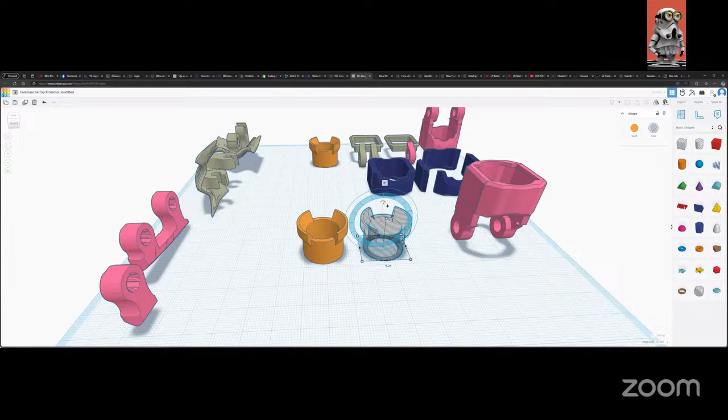So I already made a copy and stuck it up there at the end. I can actually invert it, so it's going to be a delete. And what I'm going to do is turn this thing upside down and then take it over here, and I'm just going to take it down and zoom in.

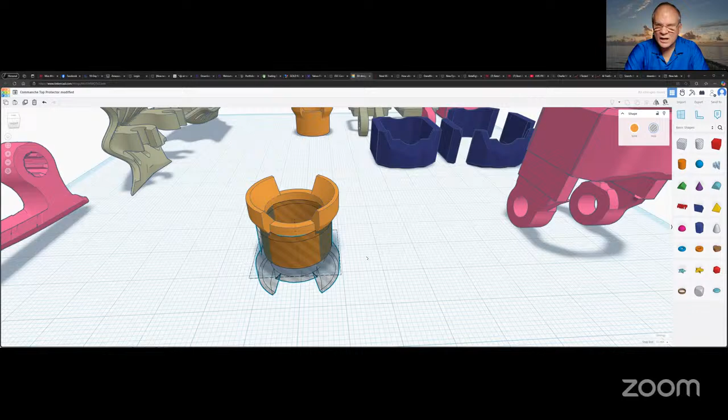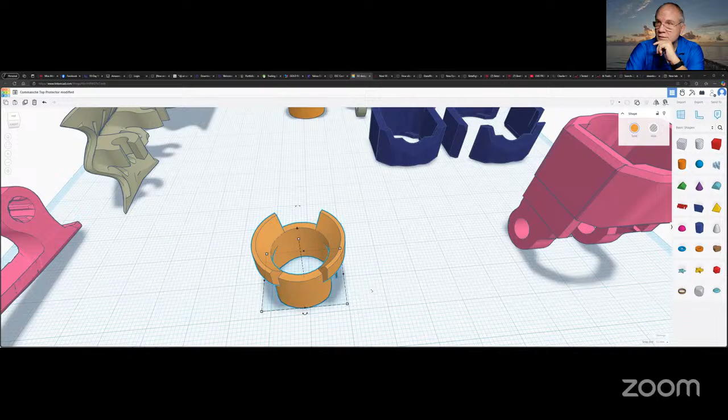So I'm kind of cutting the top of that thing off, right? Yep. So you just highlight the two, go combine it, and it does what you want it to do, hopefully. Oh, come on, do the deletion, Tinkercad. You might have had overlapping geometry.

Have you tried just a square? No, it's supposed to overlap because I've tried to delete the thing. Oh, okay, I see, misaligned geometry. I see the problem. Yeah, misaligned. Yeah, that's what I was gonna say.

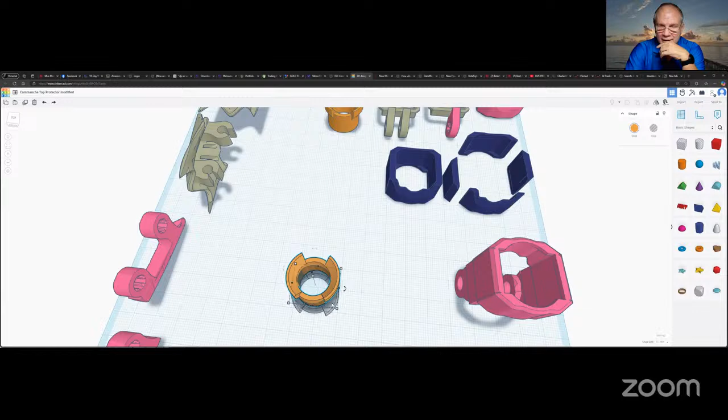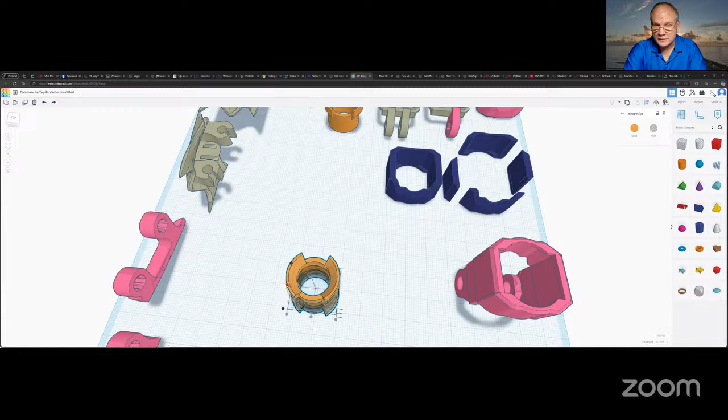When I do a Boolean operation like that, if I was just chopping off the bottom, I would do an oversized cube, line it up orthographic from the side, so I knew exactly where it was at. So Tinkercad allows you to highlight both things, click this little alignment button up here, and you'll see little dots so you can align it on the dots.

So that looks a little better. Yep, now it's probably actually aligned. Now you can see overlapping geometry. So now let's do this, we'll highlight it and put those two pieces together.

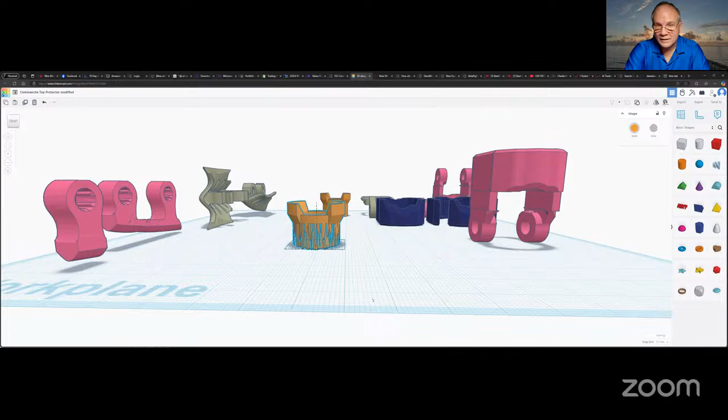Really? Oh, no, come on. They're the exact same thing, one's upside down. Yep, but they're really, really close. So you probably chopped it all boogered up. Yep, you did. Try a larger cube as your subtraction object.

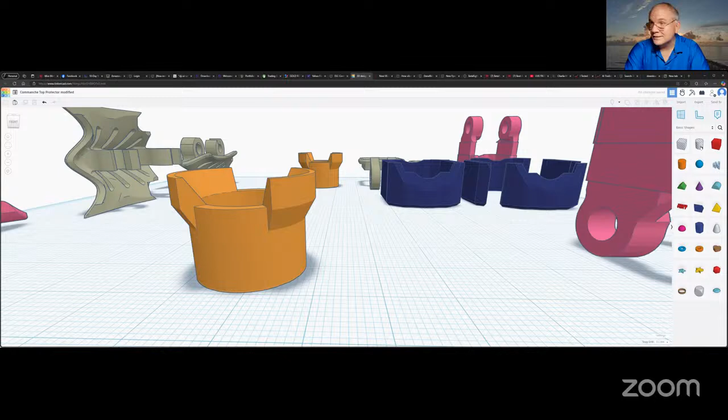Yeah, you know, I got a better idea. Or scale it. This is the kind of shit you fight in these damn apps, right? So I'm just gonna take a circle. Yeah, okay, a cube or a cylinder. Yeah, but make that your cylinder, make it a subtraction object, larger. Yeah, there we go.

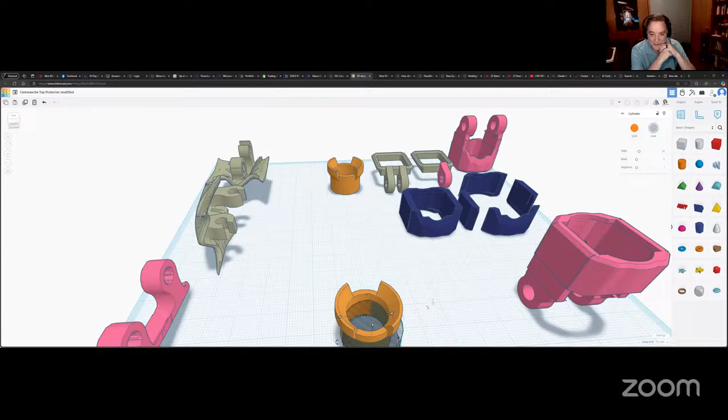That's how I would have always done it, because if you had overlapping geometry when you tried to do a deletion or a Boolean, you always got errors. So what I tend to do is exaggerate a bit, now I know I'm taking it out, right? And go, okay, now give me what I want. Okay, that's better.

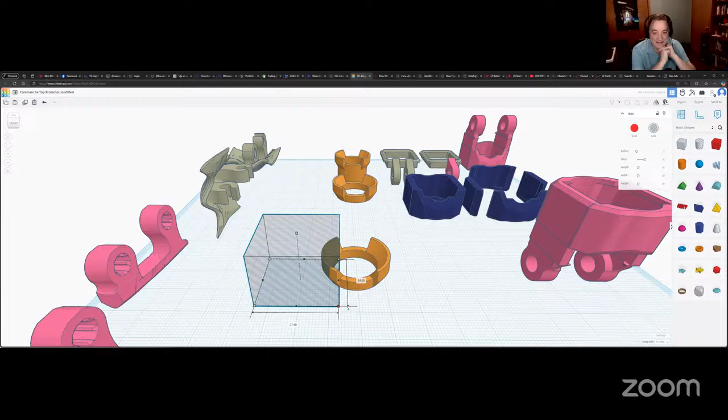So mine is kind of square, right, and that's the way this thing sits. I can't do the bottom or the top of this because that's where the mount points for the ND filters fit. So what I really want is these two things. Control C, Control V, I'm going to make another copy, stick that over there, and do something kind of similar at the center, taking half out at a time.

Why not scale your box down and take the center out and do both sides at once? Because then both sides will be one object. Yeah, but you need each side to be its own independent object. But if you're mounting stuff to that, don't you want them to stay the same size? No, because I'm gonna spread them apart, resize them to fit up on this thing. Those two round pieces, they connect to something, correct? If I took out the middle, as far as Tinkercad goes, they're one object.

Right, that way you could scale them both at the same time. You wouldn't get scaling issues trying to match them both individually.

Yeah, it kind of depends on how well this is gonna fit. I may need one that's a bit more square instead. I don't know what you have in mind, so I'm trying to jump ahead in the way I would do it, but I might not have exactly what you have in mind.

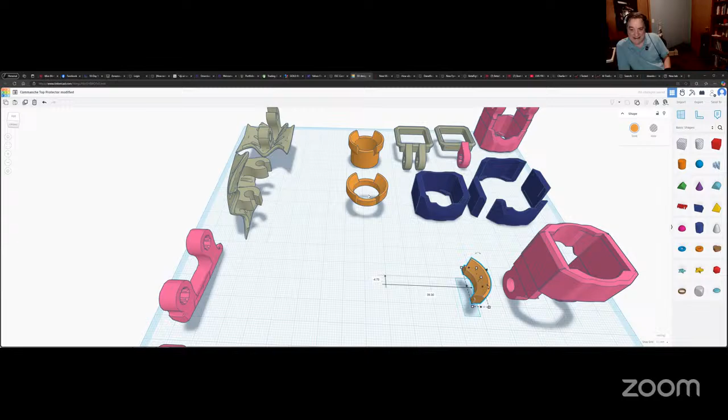Yeah, so there's one, well that's why I thought I'd... oh come on, paste, damn it. Okay, so come back. Oh come on Tinkercad, get down here, damn it.

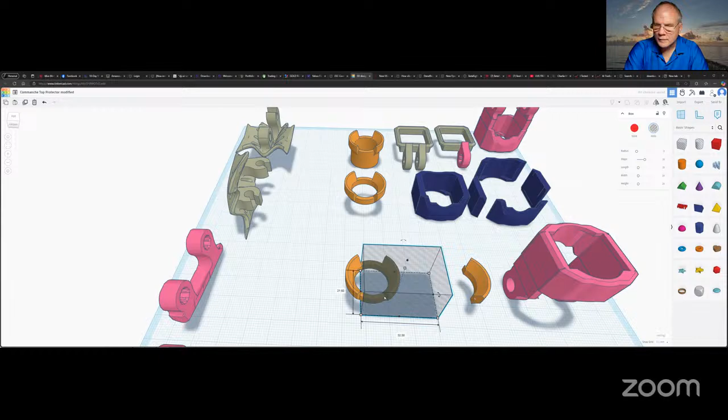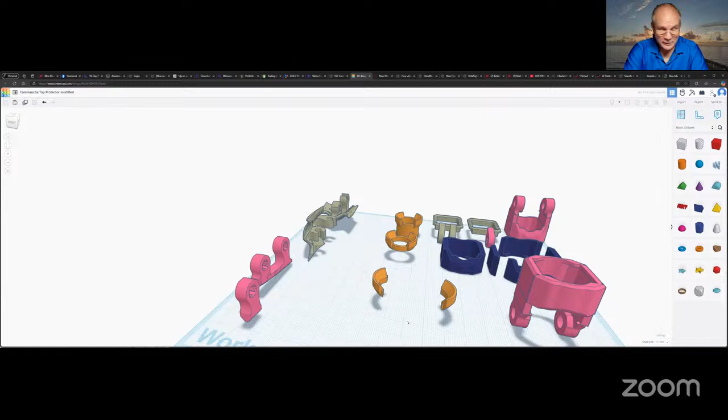Zoom in. Nope, right on, no that's about as close. There's a little triangle in there, but whatever. Usually I mush those things together and you end up never seeing them. Okay, now I got the two little independent pieces.

And you're right, theoretically they should be the same scale and all that. But if I click on it, I have dimensions, so I can literally make them the same dimensions. Actually, I could have just taken this thing, copied it, and rotated it 180, and I'd have had the same thing.

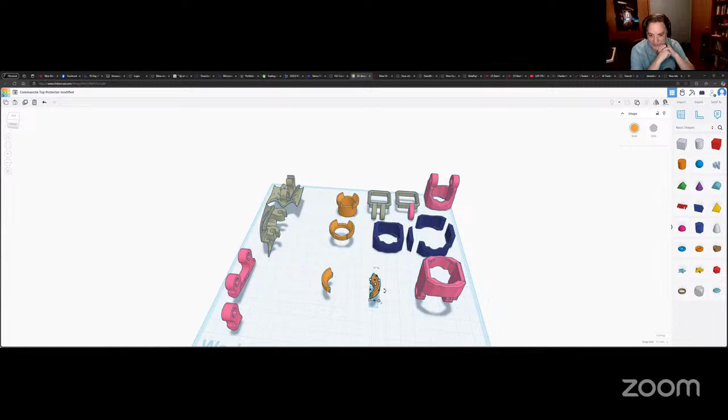Like I said, Tinkercad is basic objects, and you just got to learn how to manipulate things. Boolean operations are fundamentals of 3D creation. Nah, it's a lot of work. That looks a lot simpler than Lightwave.

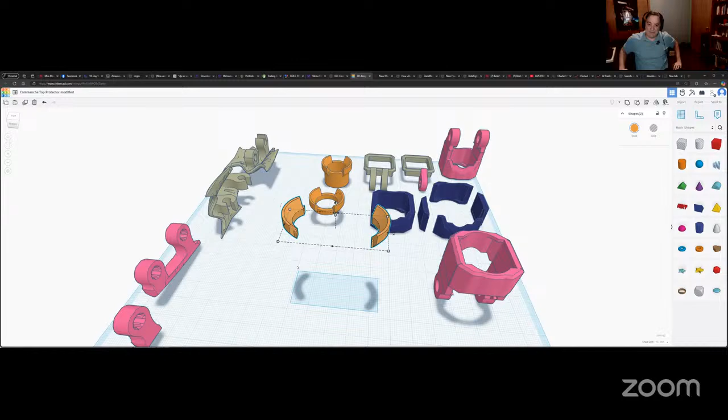Can you open up multiple view panels there, or is it just one panel? Just one panel. Oh, that sucks. Because Lightwave, you can have your 3D panel, and then you have your 3 orthographic views - top, side, and back. Keep in mind, this is from Autodesk, so they're not going to make it easy.

AutoCAD was bloody hard work. This is a dumbed down thing that they have for creating. It's free, so everybody uses it because it's bloody hell free.

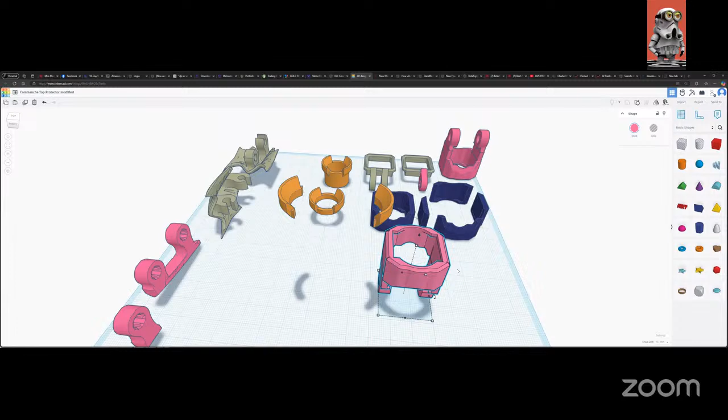I should have changed my scale back to 1 millimeter. Anyways, I'm just trying to get it in the center of the screen. Oh, not that - hold the control key. There's probably an easier way to do this, but this is just kind of how I know how to do it in this freaking app.

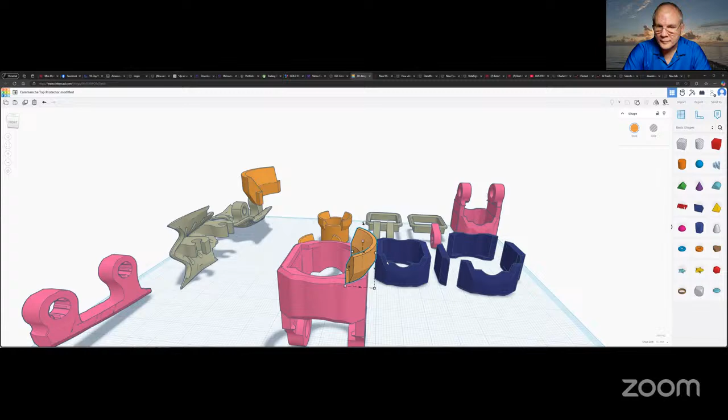Okay, let me get here. Oh, I'm a long ways off. Yeah, I'm still a ways off. Okay, I'm not off anymore. Now let's move it.

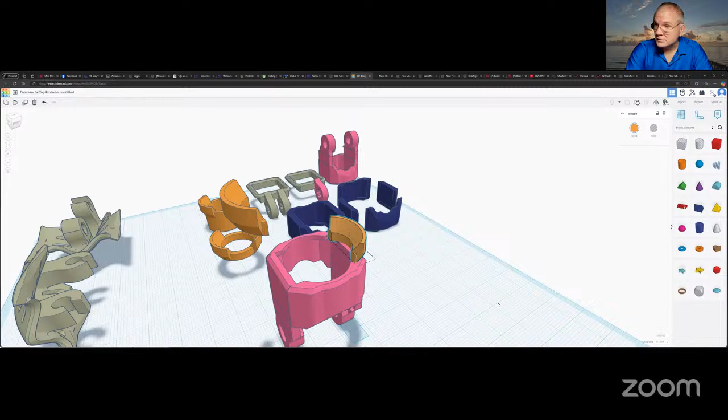Wow, guys, that's pretty close. The points are touching, so it would print okay. And there's a way to kind of fix this because it's not quite long enough, so let me do this.

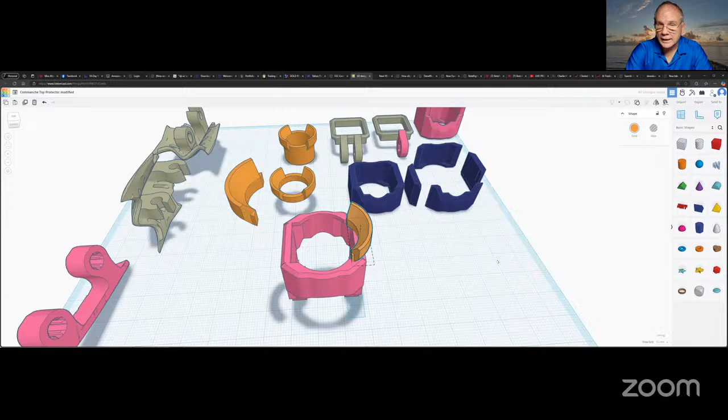Let's go instead of 18.2, let's go say 19, and then stretch that thing down. Actually, maybe I should do what I said - just copy it, rotate it 180 and put it on the other side. That would actually be easier. It looks like it needs to be longer, doesn't it? Okay, let's try 23.

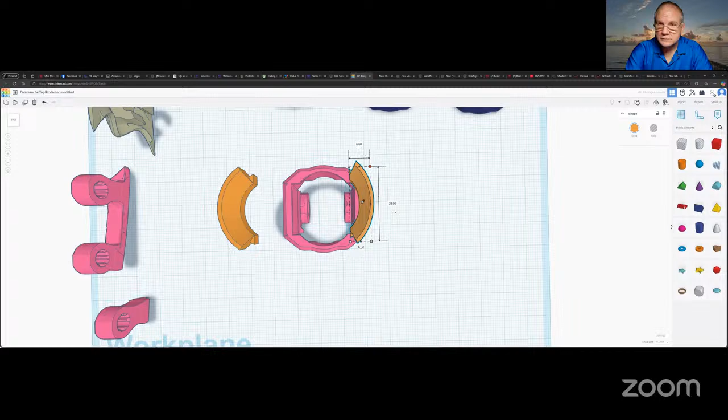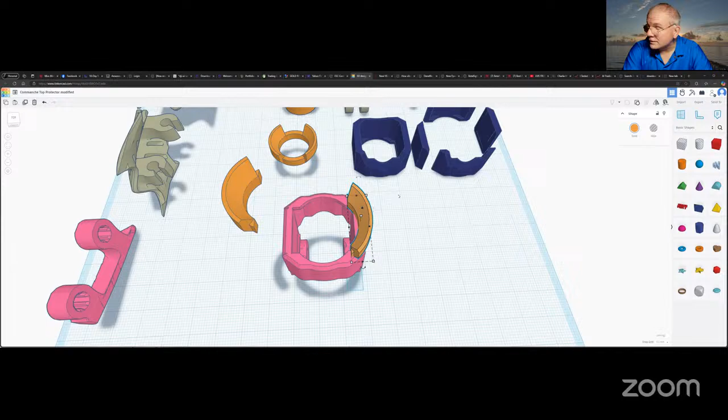What are those curved pieces that you're working on there? Are they a hood? Yeah, it's kind of like a hood. Like a sun hood? Or no? Lens hood. Lens hood, really. Yeah, and that's so that if the thing goes in nose first, the hood takes the hit, not the camera lens.

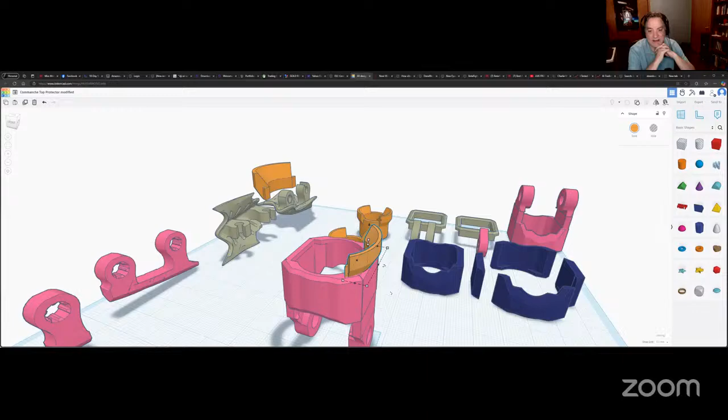So I need it to be spread out so that the camera won't see it in the wide view. It could conceivably be not just that - it could conceivably be just four or five pieces sticking out like that, depending on how much weight you want to put on it. Well, that's kind of the other part - you don't want it to be too damn heavy, right?

So if you were to have done like so, ideally I would do a different kind of curve. I just don't know how to do fucking curves in this application.

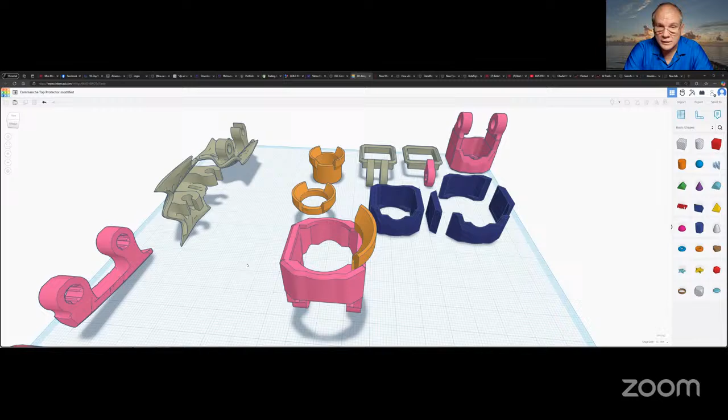Here's the funny part - I created that, now I'm going to delete it because I think I'm going to do what I was telling you, which is just copy it, rotate it 180 and put it on the other side. Literally when I do that, I can use the arrow keys and it should be lined up with the one on the other side.

Yeah, come here, move. Yep, those two pieces are touching.

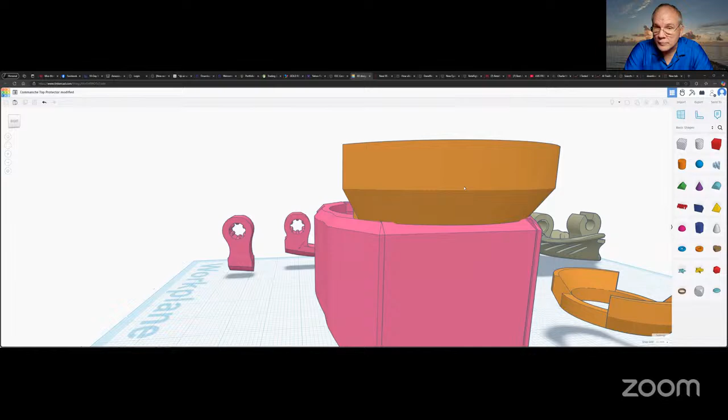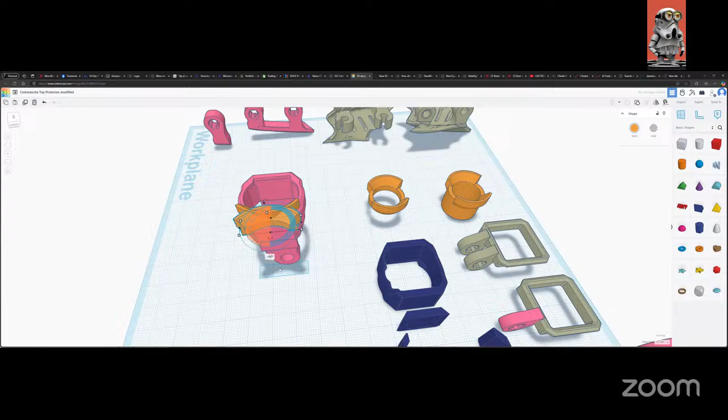The fun part of curves will be pretty straightforward. You just use a circle, put it in, and either delete outside it or inside it, one or the other, depending on which way around you want the curve.

You're not wrong. They've got another tool that's sort of a bendy object that you can use. They don't have a mirror tool.

Oh, you have a mirror tool up there. Okay, so when you do a mirror, it doesn't mirror across. Oh yeah, right there. Does it not mirror in world space, or is it just local space? Local, I would assume, local to the object. Whatever you have highlighted.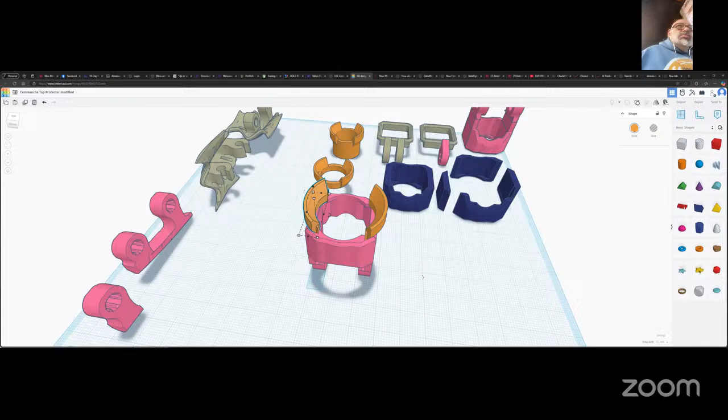Okay, let's try it. Oh, there you go, see the arrows? So you can mirror whichever direction you want to mirror it. Yeah, but it does look like it's only local to that individual object and not world space. If you shift click multiple objects, then it should treat it as one big object and mirror the whole thing.

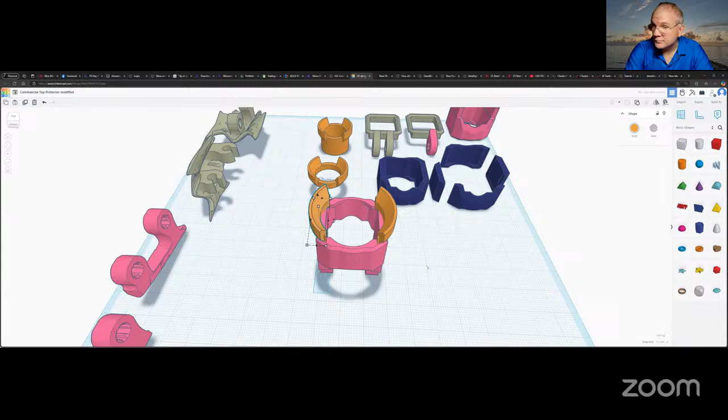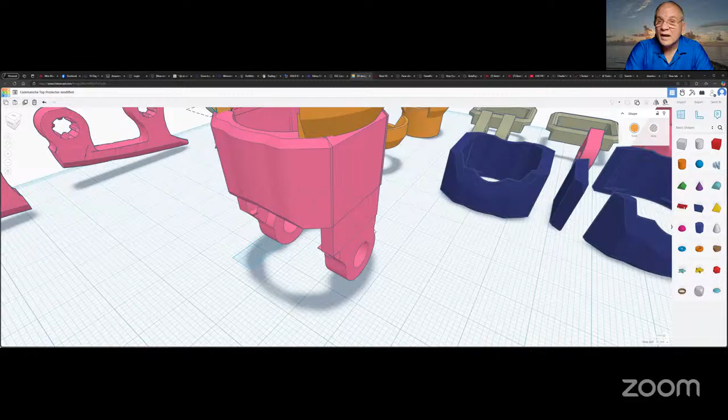Okay, now let me see something. So on this side, how close is that outside edge of that circle? Looks like it's right on the outside edge. And let's see here, that one's hanging over the edge, and that one's on the outside edge. Okay, that's weird.

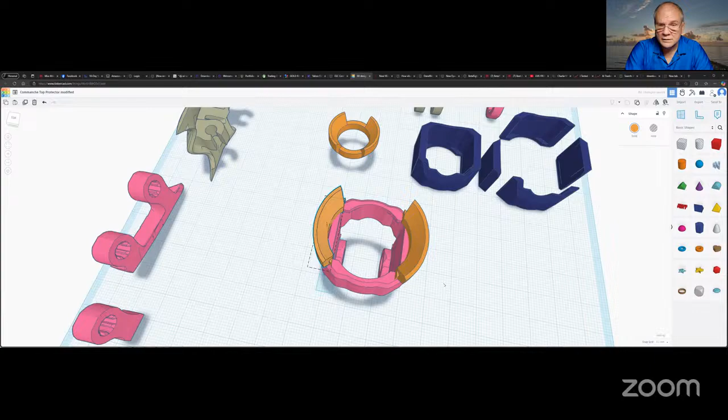The reality of it is, I think -- oh, he cut one side thinner than the other. When he designed it, he cut it one side thinner than the other. If you want to make it symmetrical, why not delete that, select both objects, flip them, copy them and then flip them, and then delete the duplicate bottom piece. That way you keep it symmetrical on both sides and lined up exactly right.

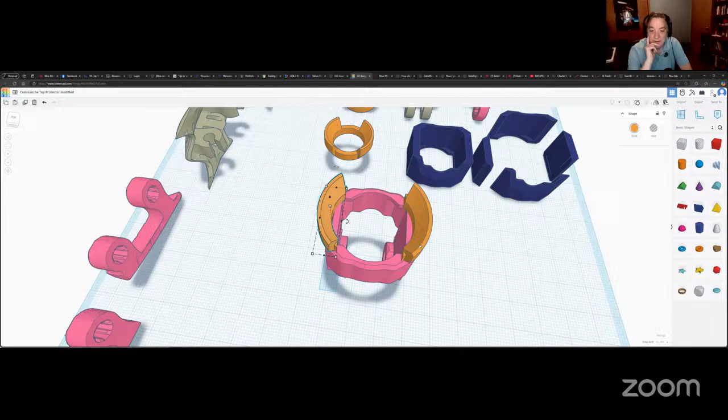Okay, I'm not following. If you were to delete the piece that you don't like how it's lined up... I think the difference might be that the wall is a different thickness on each side. On each side of your pink object, yeah. I think the pink object's walls might not be the same length, but maybe not.

So here, let's do this. Let me lift them up, and here's how I end -- oh, come on, Tinkercad. There we go.

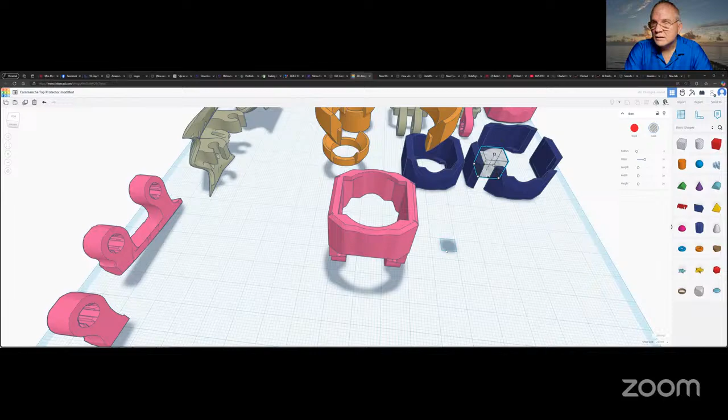Here's how I end up finding out stuff like that, since I really don't like their ruler. And how the hell did I rotate that thing? I didn't want to rotate that thing. No, that's right.

Here, something's weird. Okay, over here. Yeah, now I gotta see this change -- this is why I don't get into 3D printing, because I would delve back into 3D and it's... there. So there's kind of the edge of that wall, the inside wall.

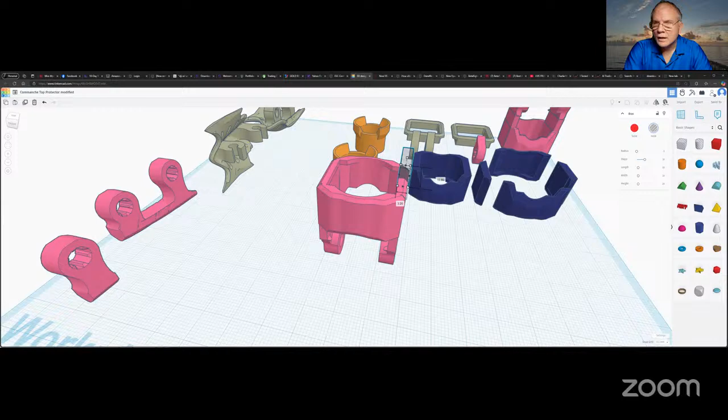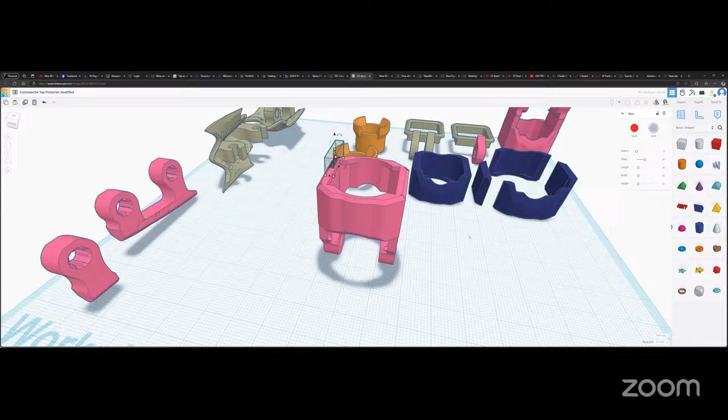13.6 roughly. Okay, now let me slide this to the other side and see whether it -- yeah, there's the answer. Done. Notice my object's a little beyond the outside on this side. So they're literally different thicknesses.

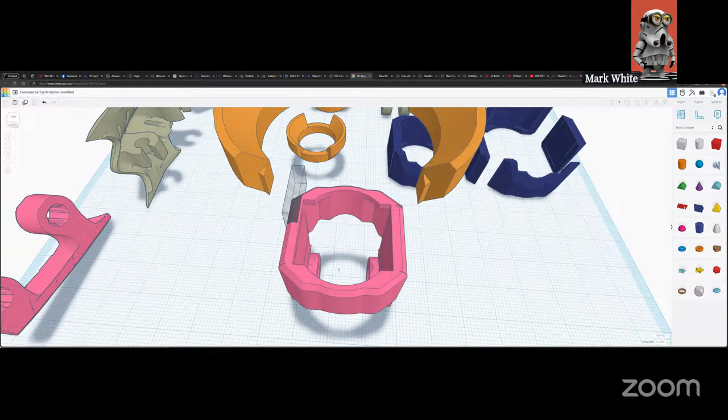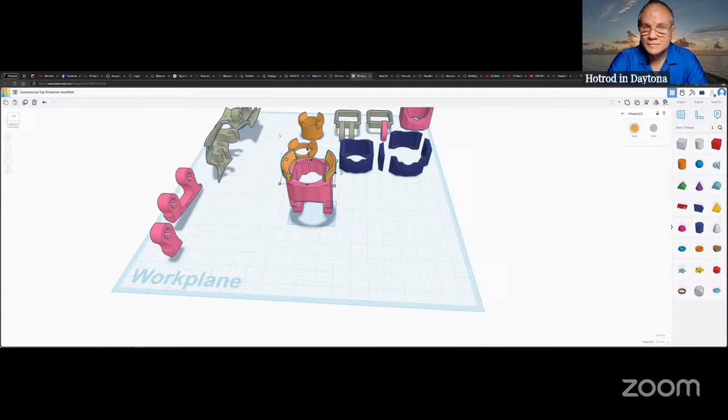Yeah, whatever, it'll print, and if it works, it'll work. If it doesn't, it doesn't. As long as it works, sometimes I don't worry about the beauty of it. Oops, I went down too far. Actually, sometimes I go down too far like that, just so that the two prints are interconnected for sure.

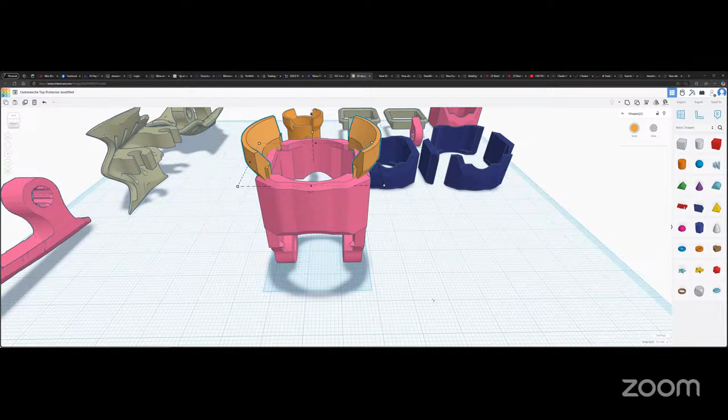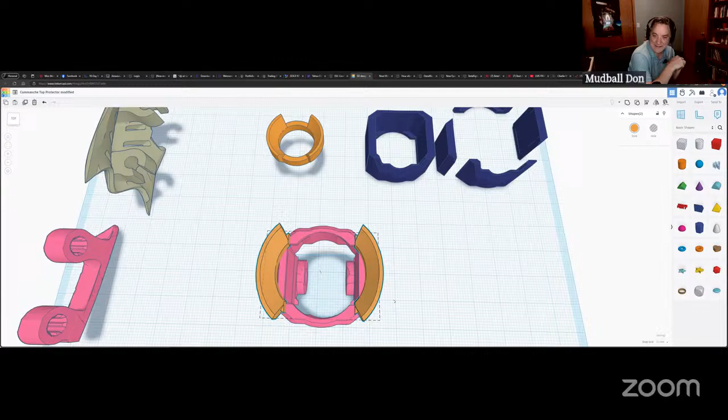I'm guessing Dominic is eating dinner or ordering dinner. No, I'm actually ordering a coffee at 7-Eleven. Oh, okay. Yeah, I forgot about time and how it works with us, Dominic. I'm ready for dinner. There you go, see?

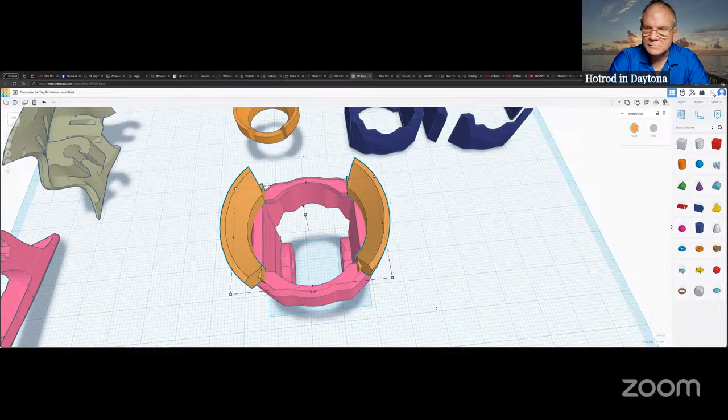I don't know, close enough. Sometimes I just say to hell with it.